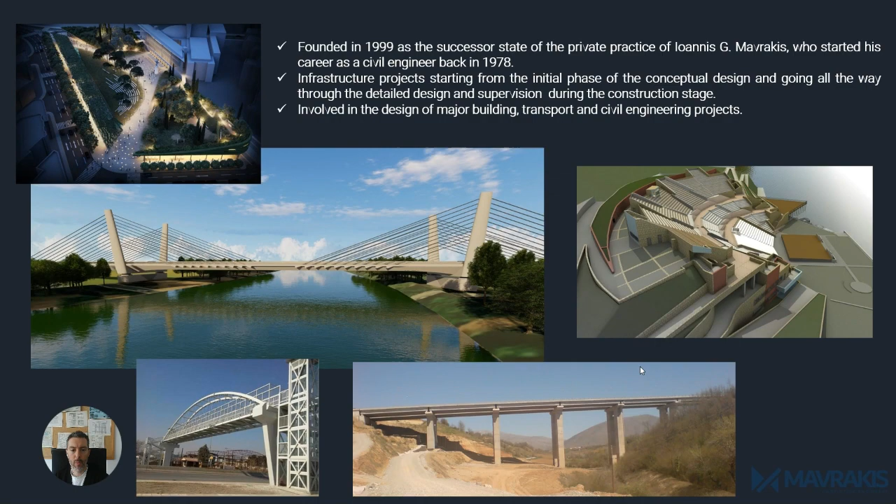Apart from that, we have also been involved in the design of major building, transport, and other civil engineering projects. The ability to deliver short deadlines at the highest possible quality enhances our competitiveness in structural and civil engineering. Technical excellence, highly educated staff, and teamwork have helped us evolve into one of the most reputable consulting firms in Greece, serving clients in the private and public sectors, both in Greece and abroad.

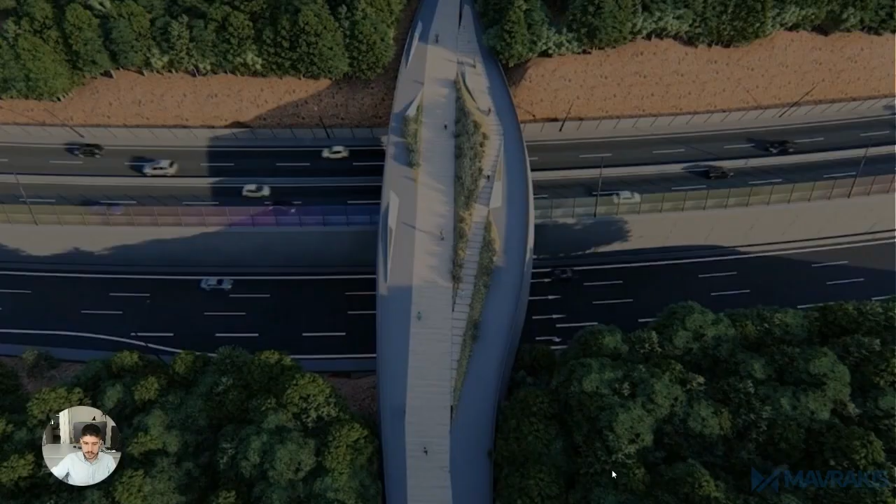The first project, the flyover project, is a 12-kilometer highway road. It will have a 7.6-kilometer elevated highway with 9 interchanges, a 4-kilometer flyover bridge, 9 bridges, 3 tunnels, and once completed, it will serve over 20,000 vehicles per hour.

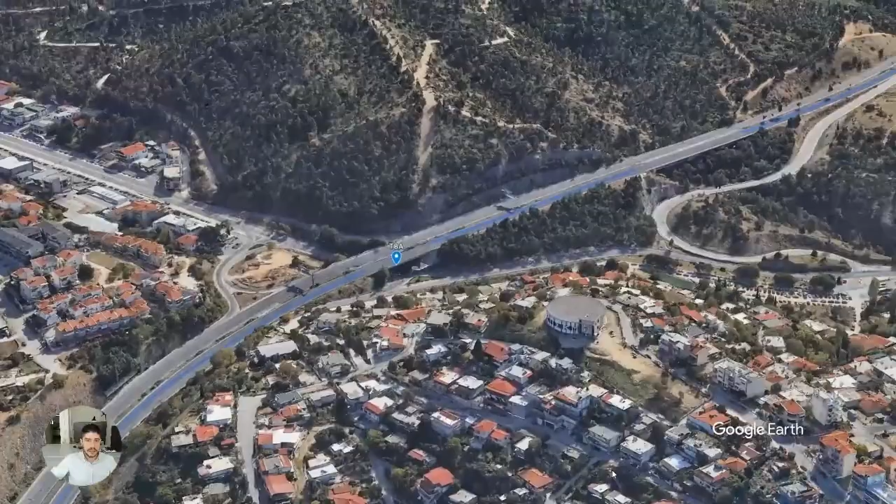Let's fly through the project. We fly over Thessaloniki. Here is the start of the project. Right afterwards, it's the T8 structure and then the T8A structure. As we continue to fly through the project, we can see the T11 bridge.

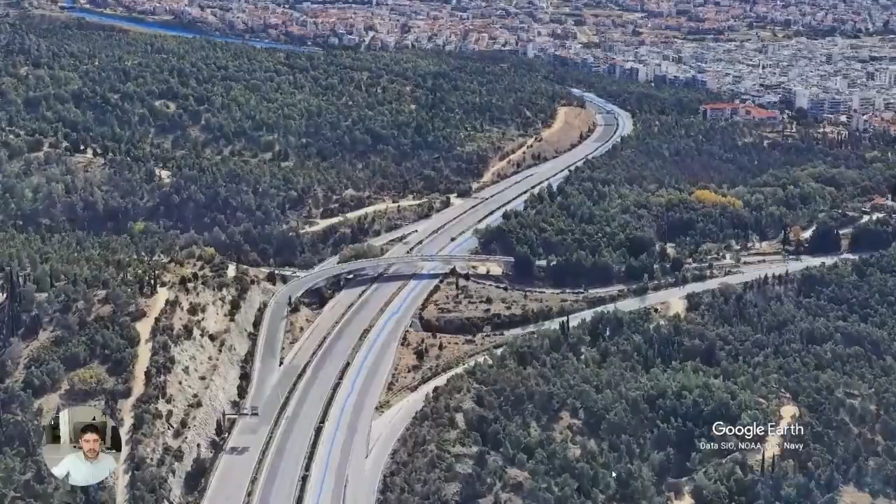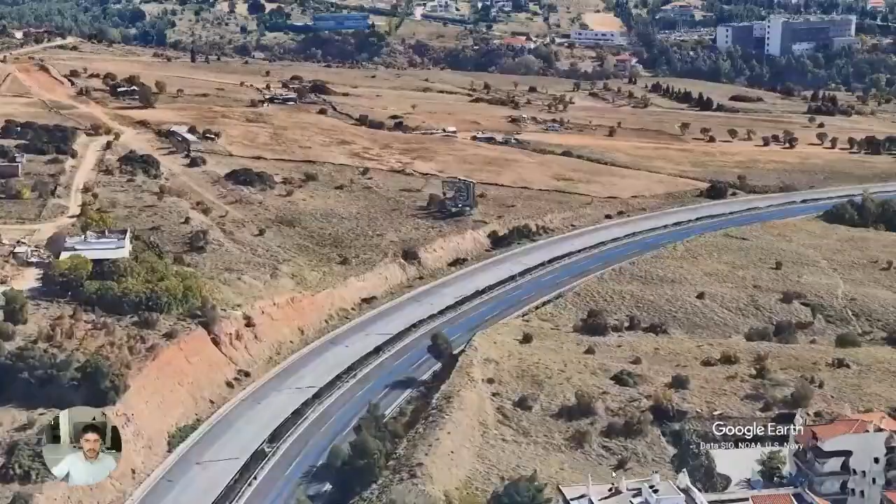Here we can see the location of the T15 structure. It's a cut and cover. Then it's the T19 structure, which is a bridge. Right afterwards, T21 is a tunnel. And near the end of the project is a composite bridge, the T23 structure.

And here is where our flyover project ends. We can see a panoramic view of the city. Here are all of the projects we are going to present from the flyover project.

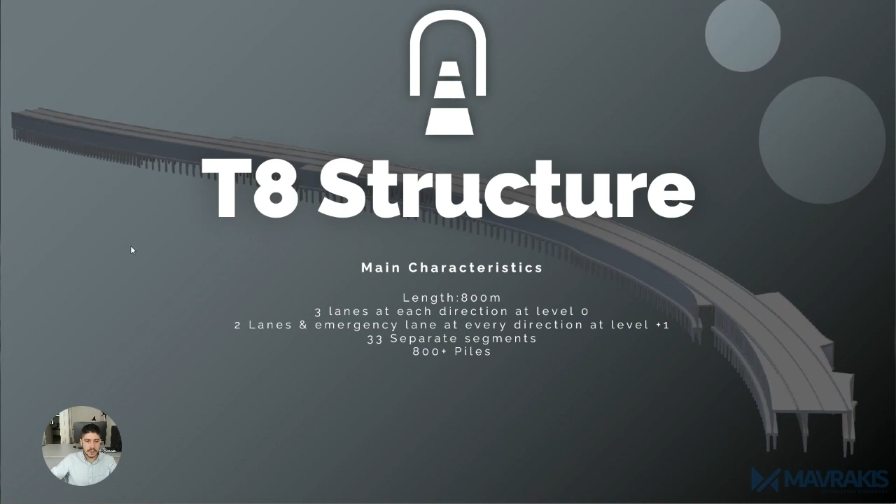Let's start with the T8 structure. It is a cut and cover with a length of 800 meters, with 3 lanes in each direction at level 0, and 2 lanes plus an emergency lane in every direction at level 1. It consists of 33 separate segments with over 800 piles. The advantages include quick and safe transportation with significant improvement of road safety. With the aim of reducing accidents, it will deflect 25 to 35% of traffic at level 1.

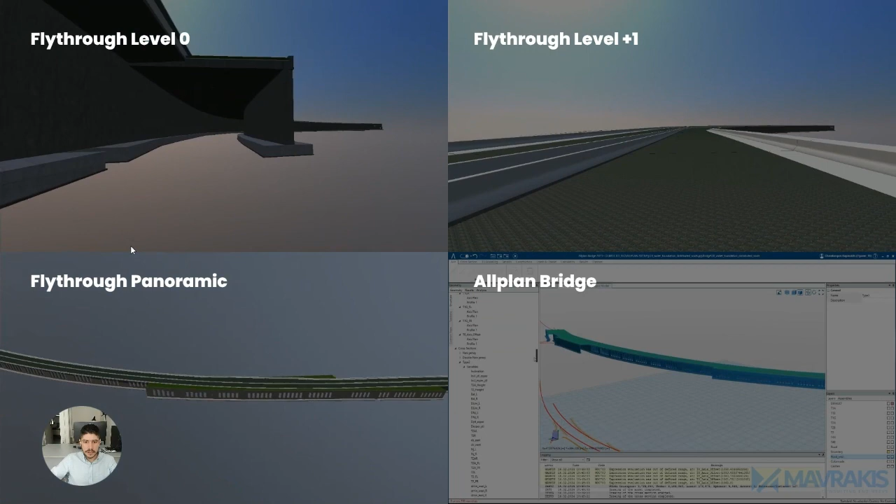Here we can see some recordings from the design process in Allplan and Allplan Bridge: a fly-through at level 0 and level 1, a panoramic view, and the design process we followed in Allplan Bridge. We can see some cross sections here in the bottom right window.

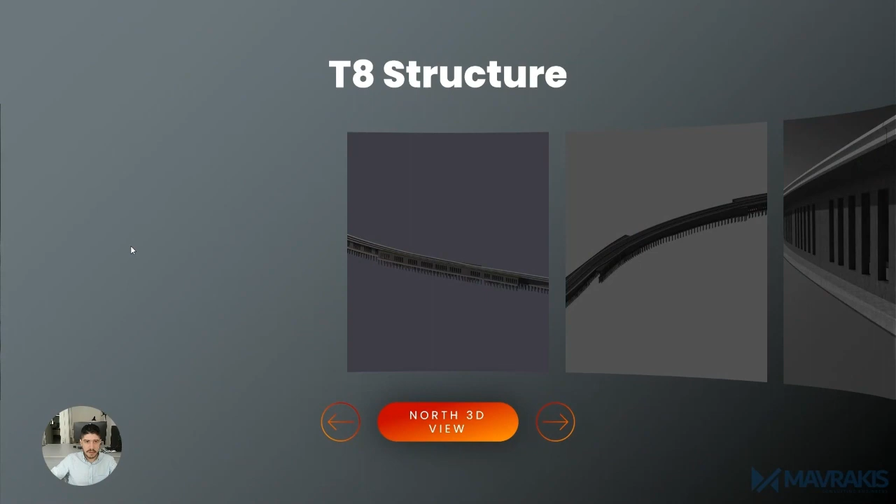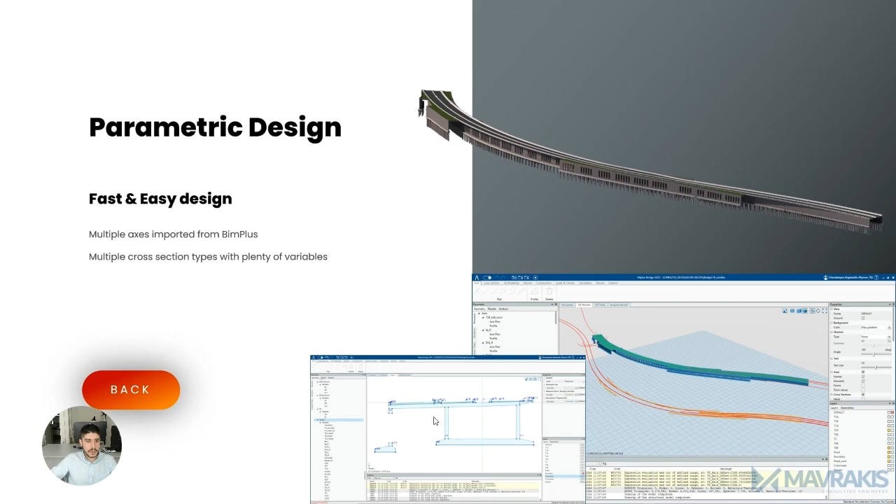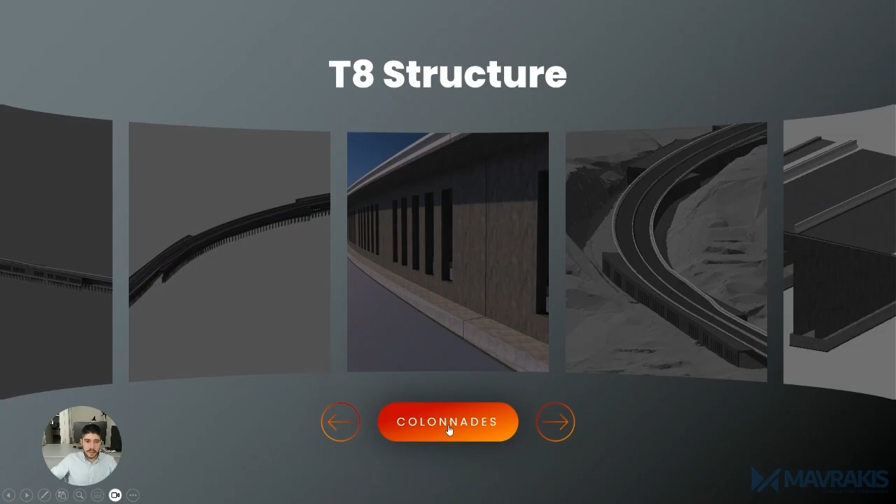Let's have a look at some images of the project. We used BimPlus for multiple axis import, which helped us design the walls of this structure. We used Allplan Bridge to design multiple cross sections with plenty of variables. We also used special functions and formulas to accurately design the geometry of T8. The colonnade design was made with the help of other programs too.

We exported the station of the colonnades relative to the main axis of the T8 structure with the help of Dynamo and Civil 3D, and then imported it into Allplan Bridge. Colonnade design was also made with the help of variation tables.

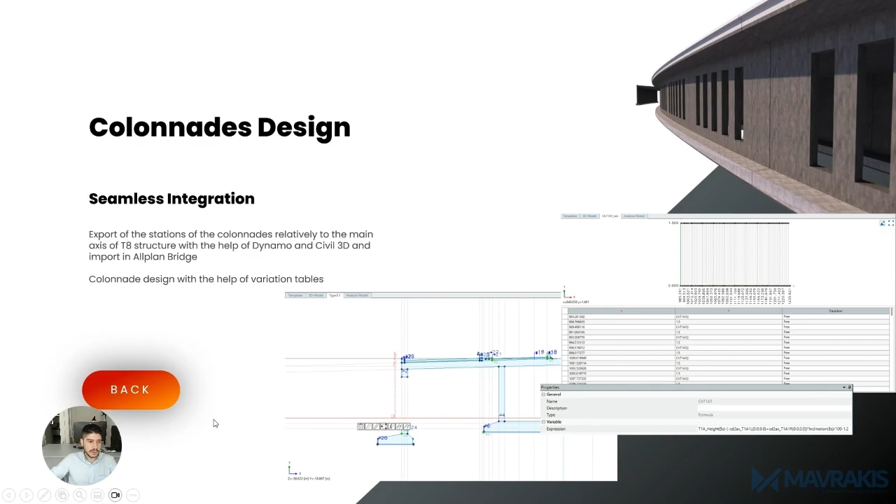We used Allplan to import the terrain of the project, which helped us export directly the terrain line in the drawings.

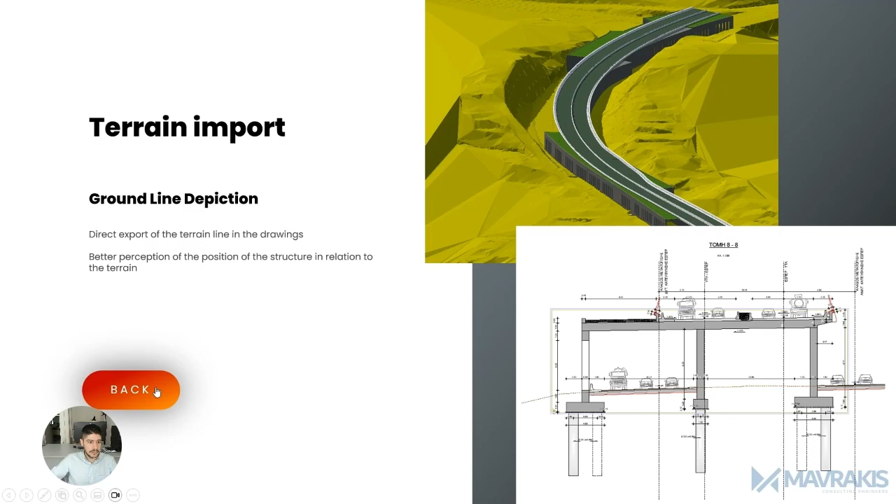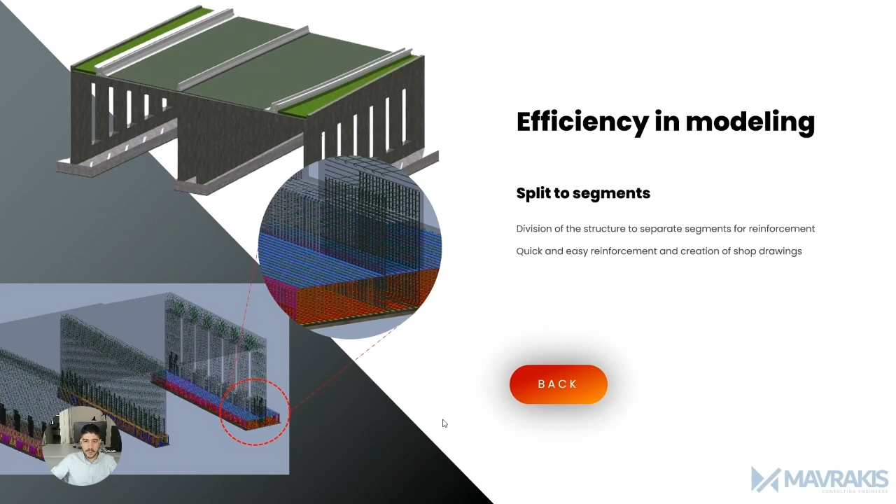We split our structure into 33 different segments for the reinforcement of the structure. Visual scripting played a crucial role in the design process, helping us place over 800 piles easily and quickly, saving plenty of hours of repetitive work.

Then we can see how we reinforce the piles I mentioned above. The reinforcement of the piles was made with the help of PythonParts, allowing us to easily and quickly create reinforcement drawings. In the end, we can see some drawings from this project.

Let's have a look at the second structure of the flyover project, the T8A structure. It has a length of 200 meters with 3 lanes in each direction at level 0, and 2 lanes plus an emergency lane in every direction at level 1. It consists of 2 sub-bridges, 15 piers, and 46 girders.

We can now see some recordings of our design process for this structure in Allplan and in Allplan Bridge.

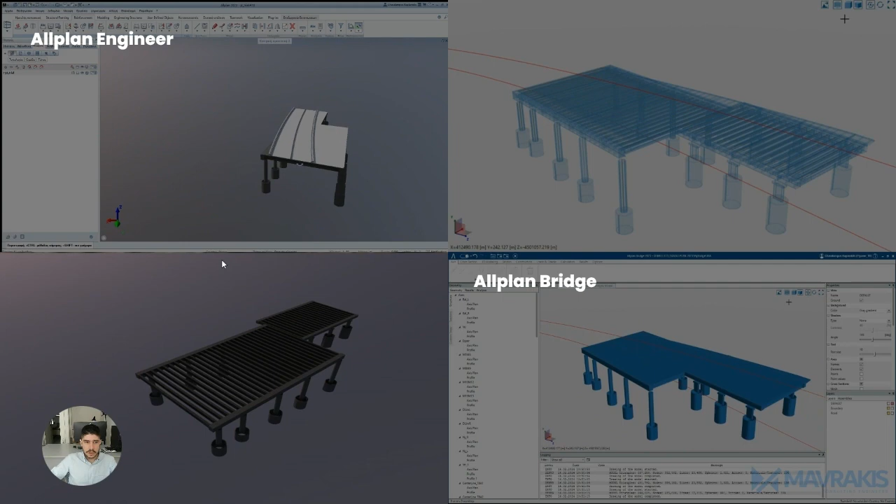We have designed the road above the upper slab with the help of Haunch function, and we have also imported multiple axes from BimPlus.

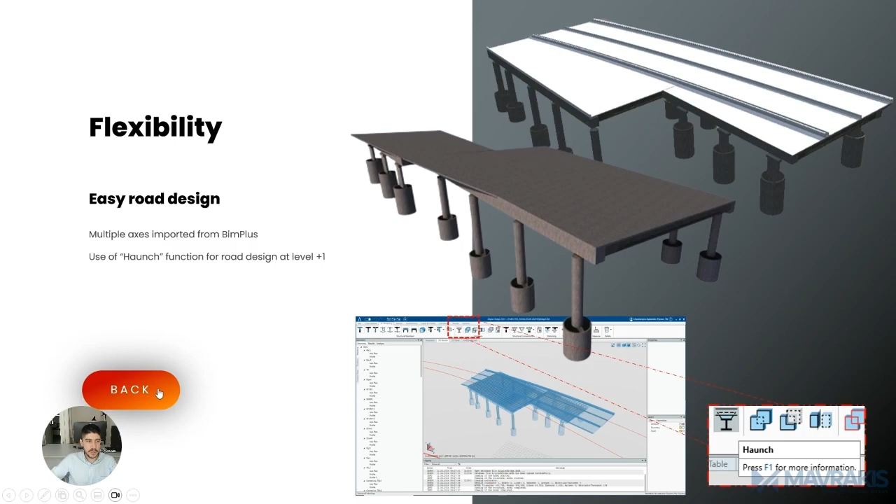The girders were designed easily with the help of the template function that Allplan Bridge offers, and a single change at the template applies to all members of the same type at once.

We have also imported the terrain as we did in the previous project, which helped us check if there were any collisions between piers and terrain.

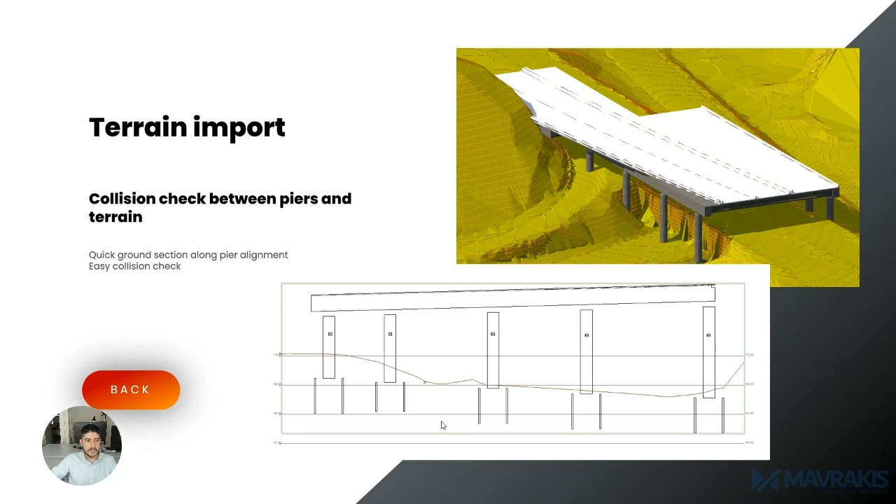Let's have a look at the third structure of this project. It's a curved bridge with a length of 100 meters with 1 lane at each direction. The bridge has great curvature. It's a concrete box bridge with 4 piers and it's seismic isolated.

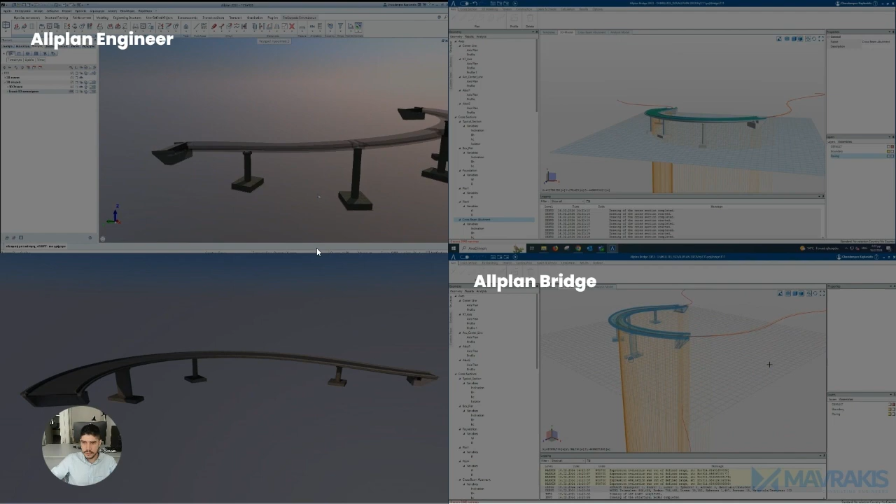Now we can see some recordings of these bridges from Allplan and Allplan Bridge.

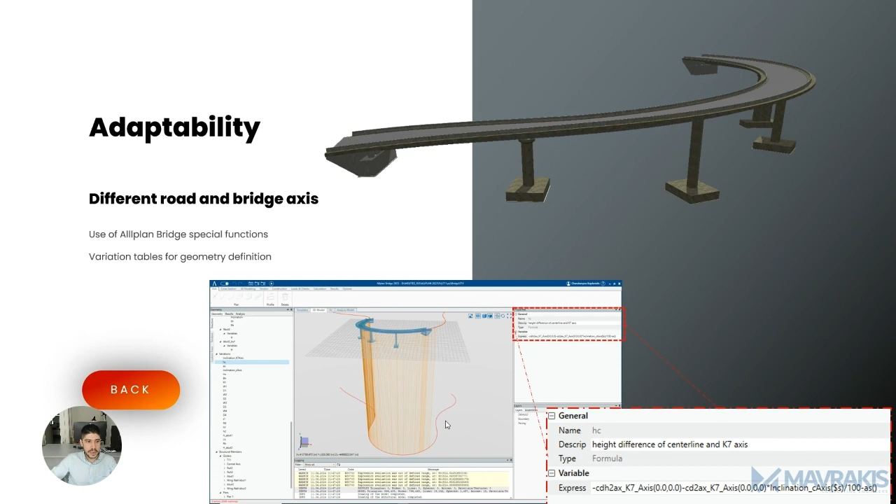The road axis and bridge axis were different, and the variation tables and special functions that Allplan Bridge offers helped us a lot.

We have used smart symbols to import seismic isolators in Allplan Engineer from Allplan Bridge directly, and then we can easily check the height of the consoles.

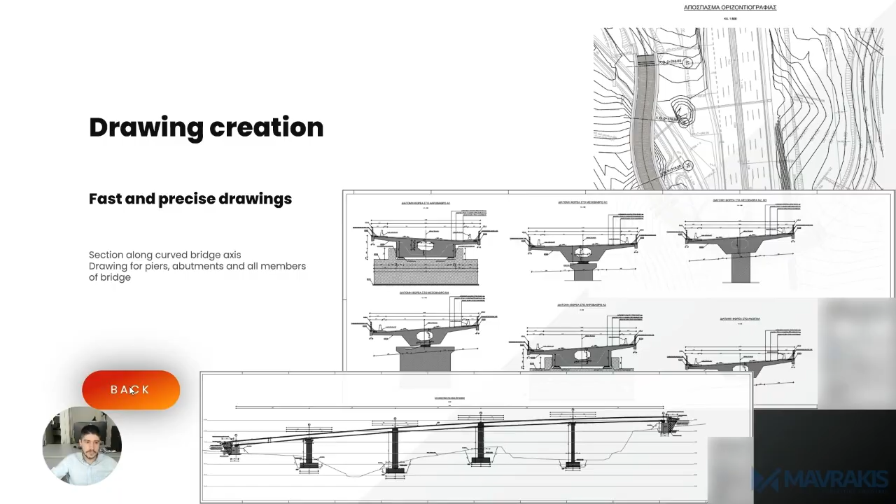Now we can see some drawings of the T11 structure, and we can continue to the fourth structure of the flyover project, T15.

T15 has a length of 700 meters with 3 lanes at each direction at level 0, and 2 lanes and an emergency lane at every direction at level 1. It consists of 26 separate segments.

It helps for quick and safe transportation, and it will deflect 25 to 35% of traffic at level 1.

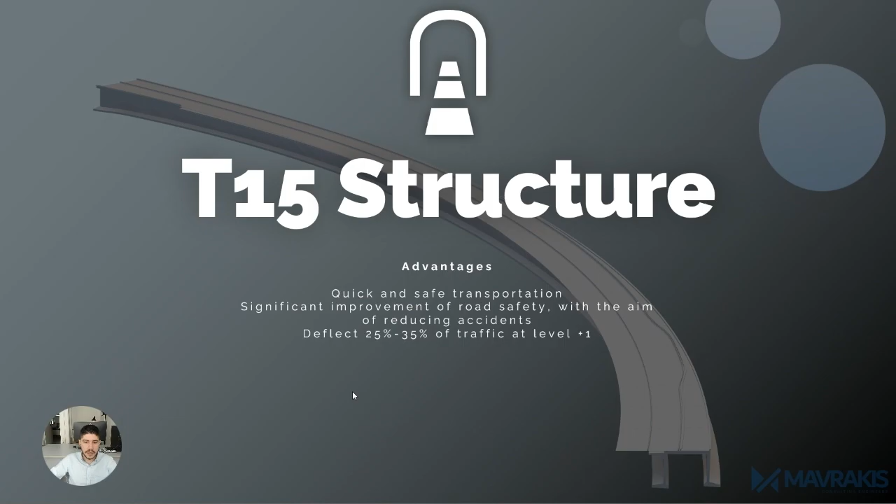Here we can see some recordings from Allplan, a fly-through panoramic view, and a fly-through at level 1 and 0.

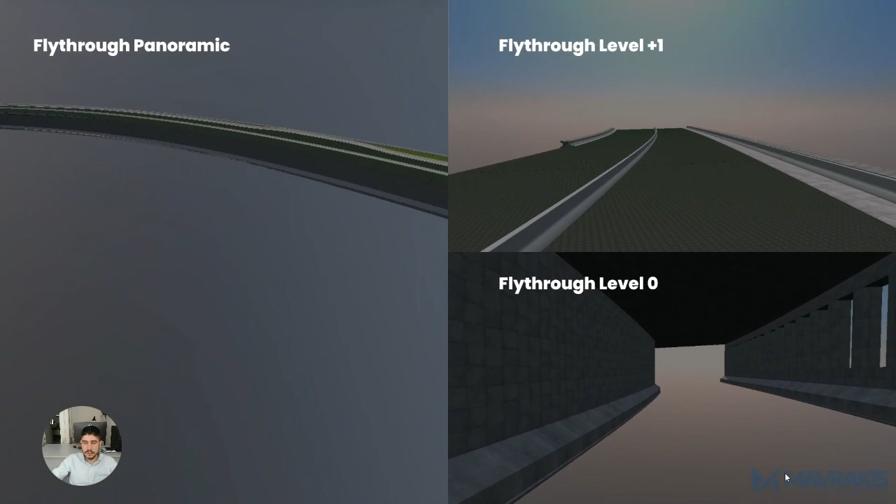And we can see also some recordings from Allplan Bridge and from the reinforcement of a segment.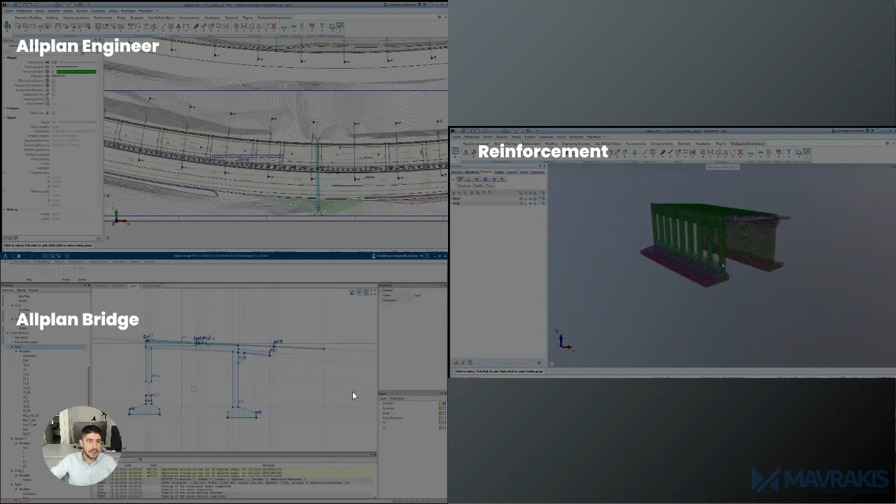We can see also some drawings that were made in Allplan fast and easily.

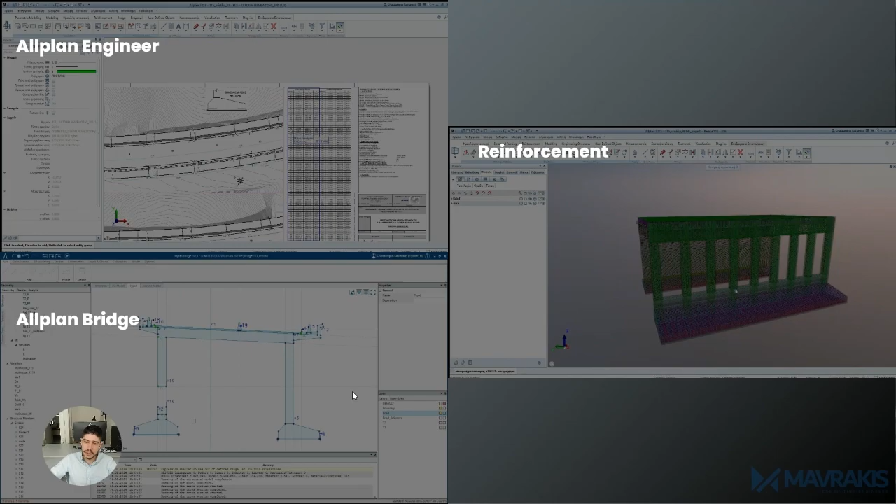We can see some cross-section types of the project at the bottom left window, and a 3D detailed view of reinforcement in the right window.

Let's continue with some images of the project. We have also imported multiple axes from Bimplus, and we have designed it with the help of multiple cross-section types with plenty of variables.

The colonnades were designed easily with the help of other programs too, such as Dynamo and Civil 3D.

And the import of the terrain helped us depict directly the ground plane in our drawings.

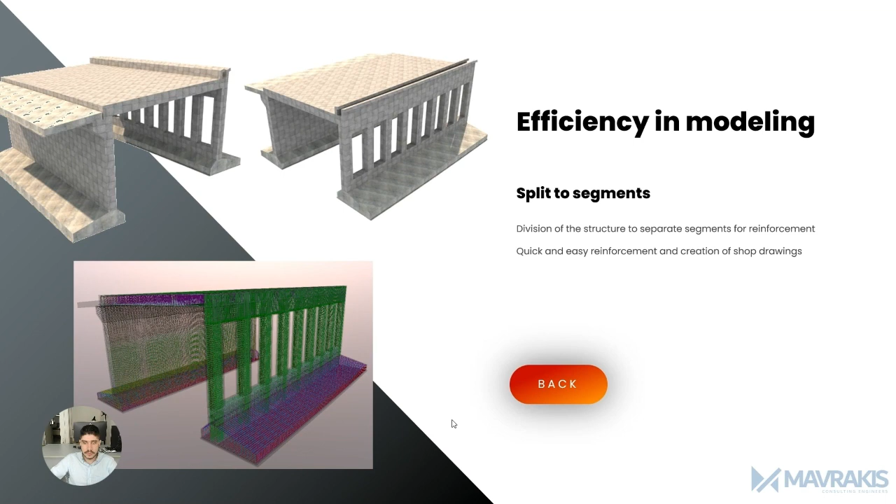Here is an image from the reinforcement of one of our segments, which helped us a lot to create fast and easily shop drawings.

And in the end are some other drawings of this structure. Now let's have a look at another structure of this project.

It's the T19 structure. It's a pedestrian bridge with 50-meter length, and it serves as a passage for emergency vehicles of the city.

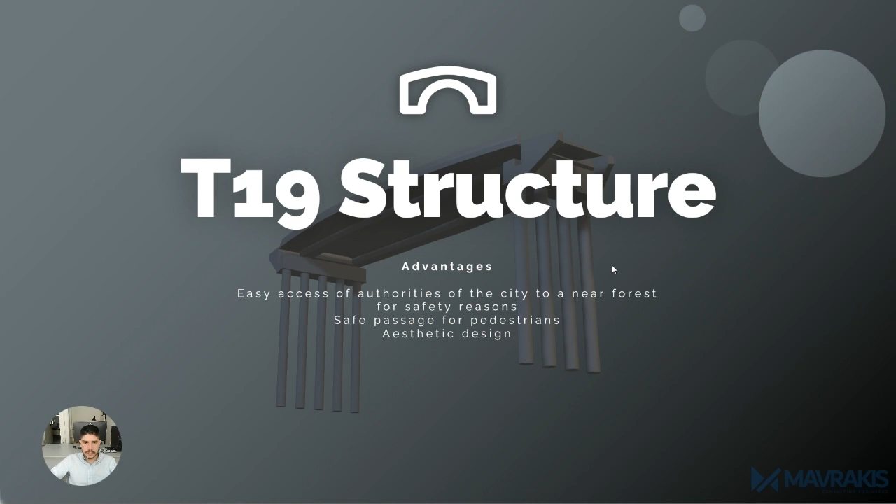It helps the authorities of the city access a nearby forest for safety reasons. It has an aesthetic design too.

We can see some recordings of this structure from Allplan and Allplan Bridge. Beneath this structure is the T15 structure, as we can see here.

We have checked if there were any collisions between these two structures.

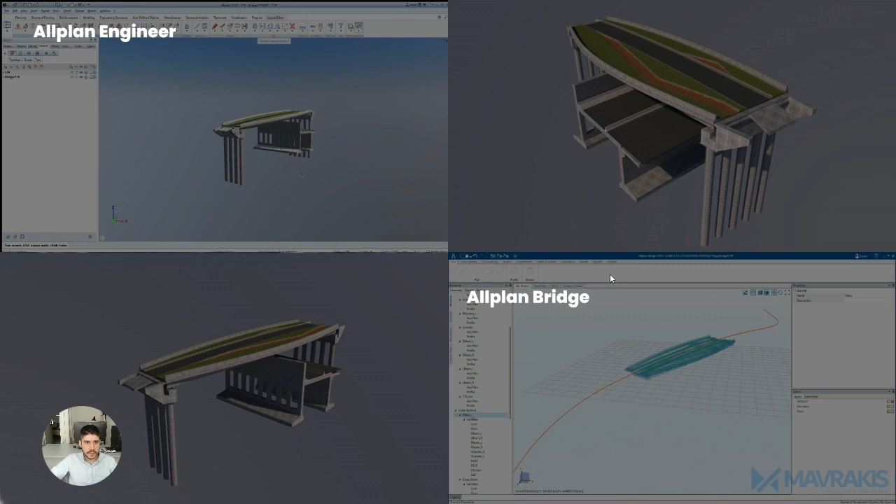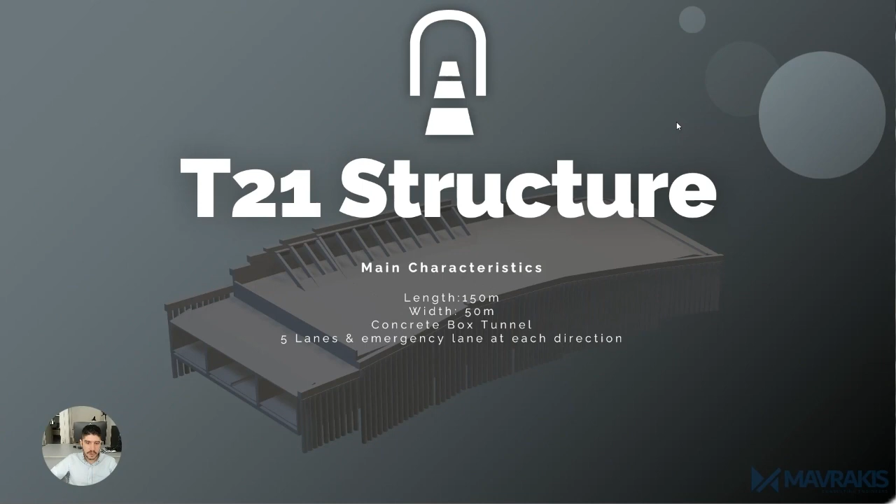Now let's continue with the T21 structure. It's a tunnel with a length of 150 meters and a width of 50 meters.

It's a concrete box tunnel with 5 lanes and an emergency lane at each direction. It consists of 2 curved pile walls with 180 piles.

We can see some recordings of this project from Allplan and Allplan Bridge.

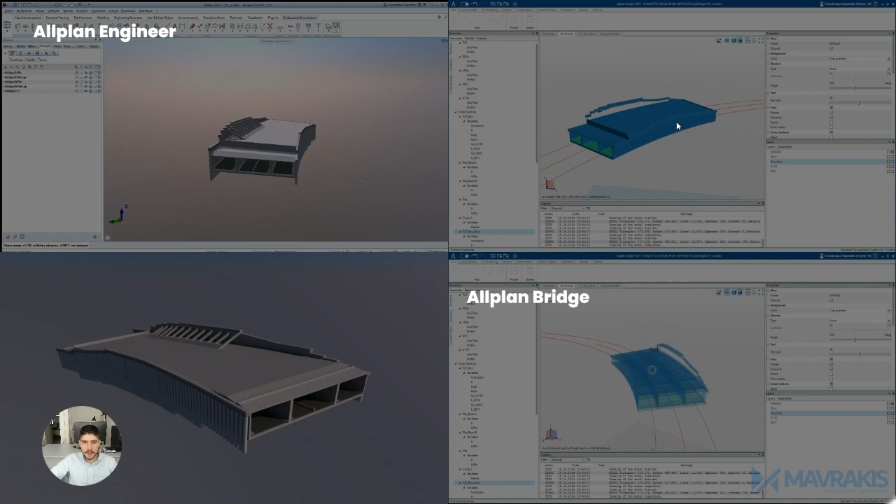Now let's have a look at some images of this project. Pile walls were designed with the help of Python parts.

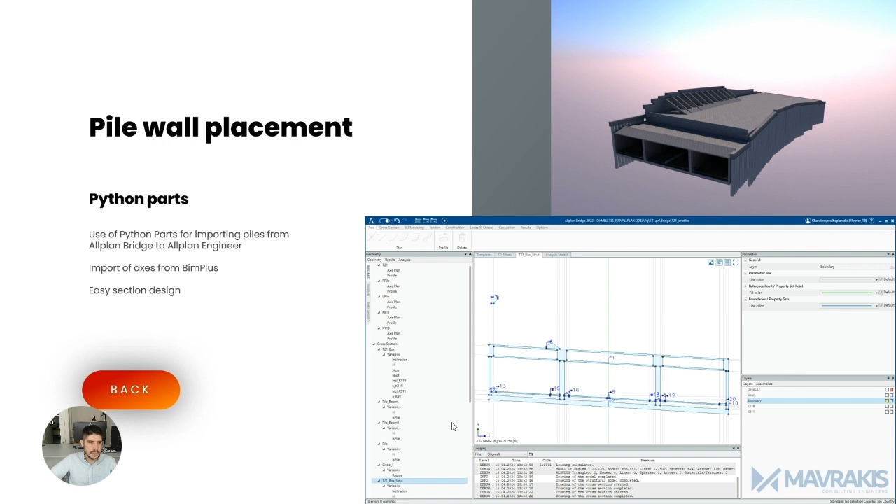We used Python parts for importing piles from Allplan Bridge to Allplan Engineer, and the axes were imported from Bimplus.

These are some drawings from the structure. The section-along-curve function helped us make the section you see here.

Now let's continue with the last structure of this project, T23. T23 structure is a composite bridge of 50 meters length, and it is a Homberg beam type bridge.

It consists of 2 lanes at each direction. The advantages of this bridge are fast and easy construction and the minimum possible disturbance to the traffic level beneath the bridge.

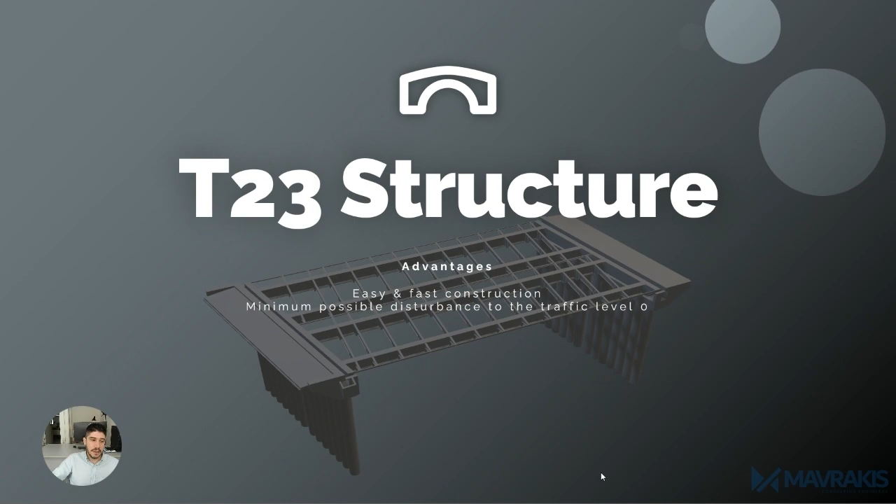Here we can see some recordings of Allplan and Allplan Bridge. As we can see, the composite section was designed as a hybrid between Allplan Bridge and Allplan Engineer.

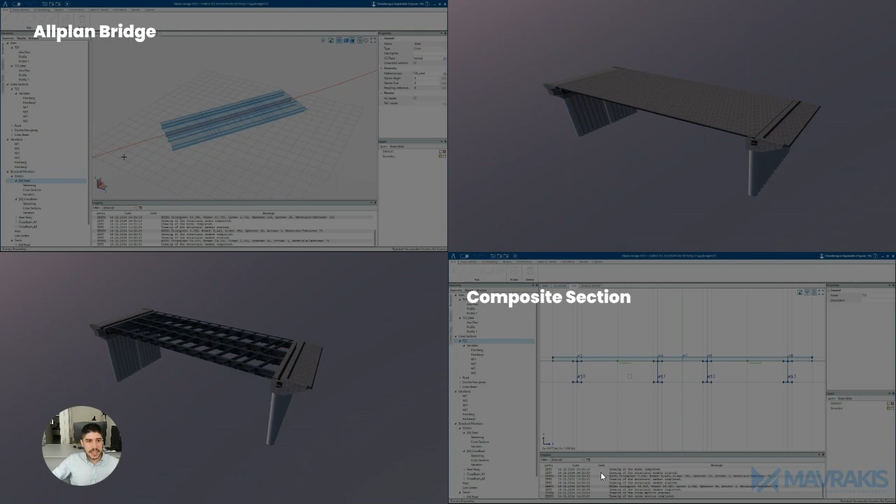What I'm saying is longitudinal plates were designed inside Allplan Bridge, but Homberg beams were designed inside Allplan Engineer as smart symbols.

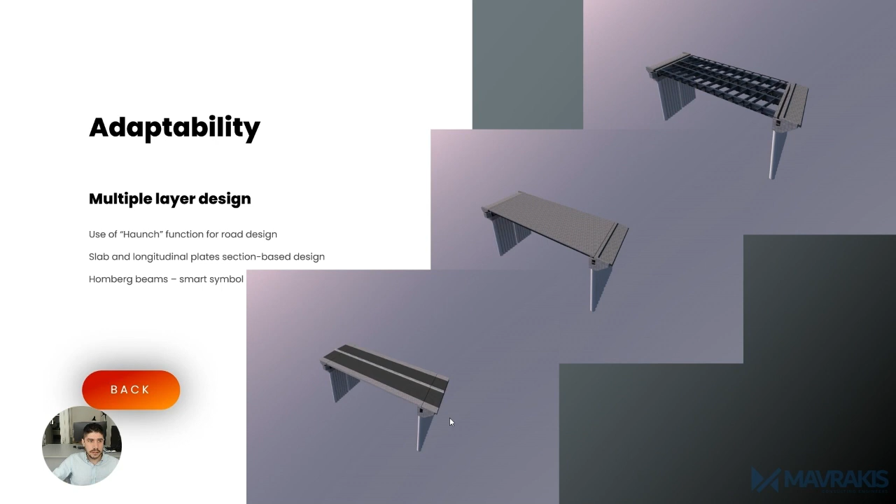For the superstructure of the bridge, we used the Haunch function for the variable height of road layers. But Homberg beams, as we said, were designed inside Allplan Engineer as smart symbols.

Here we can see a more detailed picture of Homberg beams.

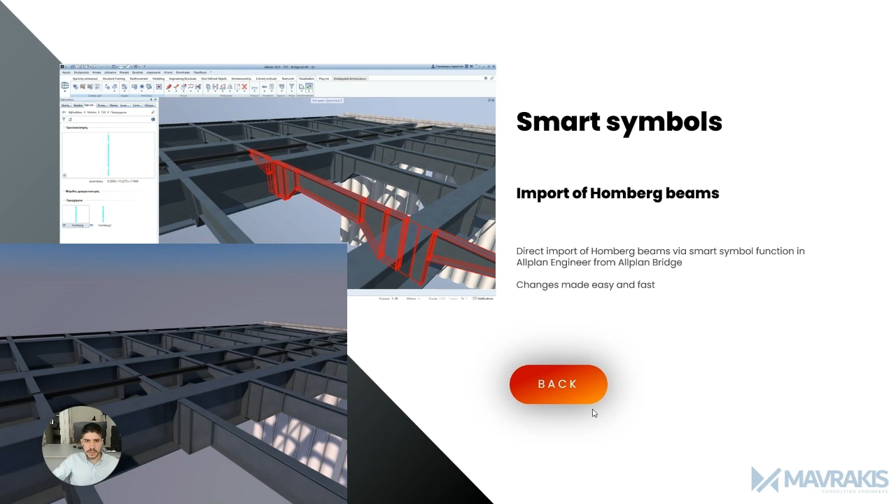Changes were made easily and fast and applied to all Homberg beams at once. And here are some drawings of the project from Allplan Engineer.

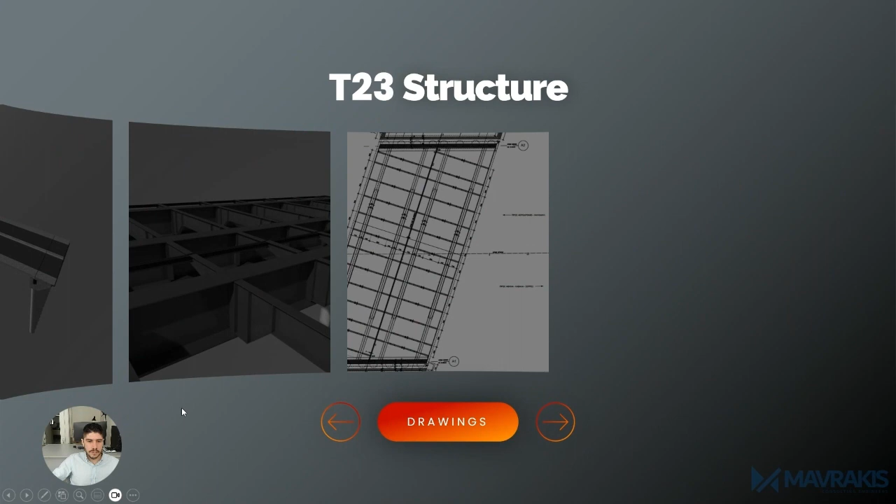Now let's continue with another interesting project, the Evros project. It's a bridge between Greece and Turkey, which will boost the economy for both countries. It's an extra-dosed bridge with two access bridges, part of the Egnatia Highway, Thessaloniki-Kipi section, located at the Greece-Turkey borders.

It has a length of 840 meters, 350 meters in Greek territory and 490 meters in Turkish territory. The length of the main bridge is 400 meters. It consists of 13 piers, 2 pylons of the main bridge, 2 abutments, 80 stay cables, 400 tendons, and 296 piles.

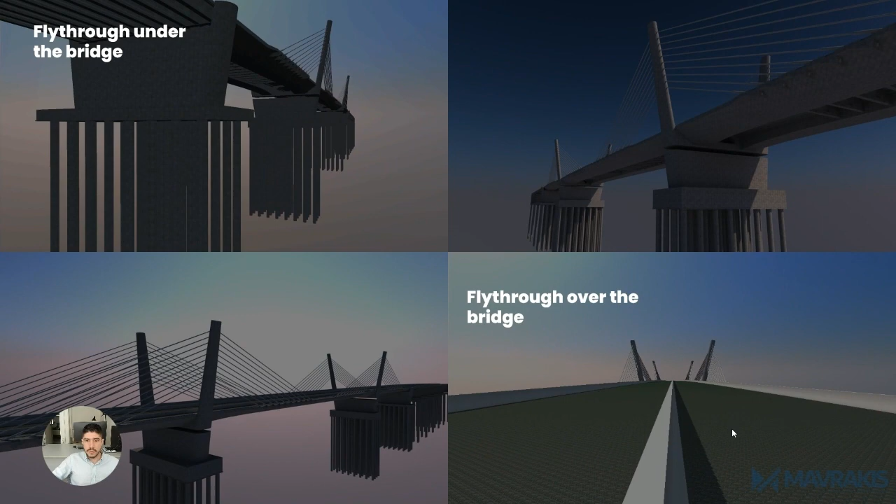Here are some recordings from the bridge, a fly-through under the bridge and a fly-through over the bridge. We can also see recordings from the reinforcement of the bridge and of the concrete blocks of the bridge.

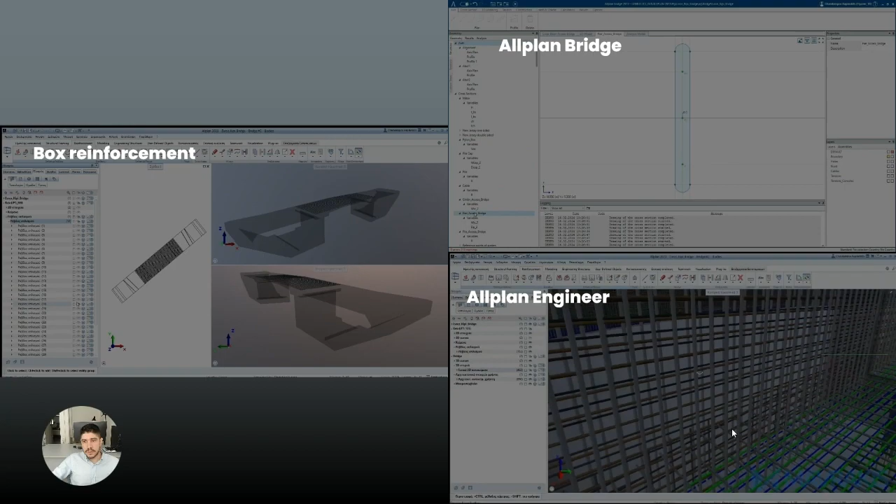We can also see recordings from Allplan Bridge, as we have designed multiple cross-section types for the main box, for stay cables, and for the abutments and piers of the bridge. We have also designed the tendons of the bridge, as we can see here in the 3D model.

Let's have a look at some images of this project. The definition of main geometry was made in Allplan Bridge, but special geometry like the elliptical cross-section pylons of variable dimension were made in the end in Allplan Engineer.

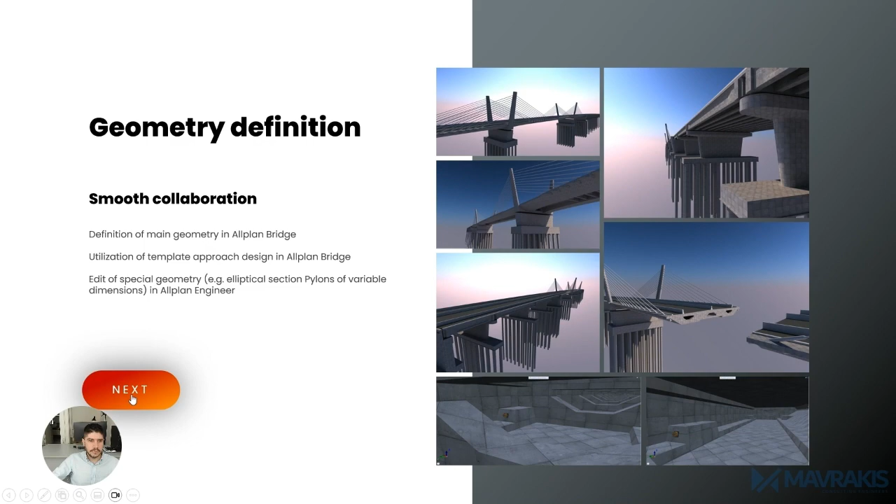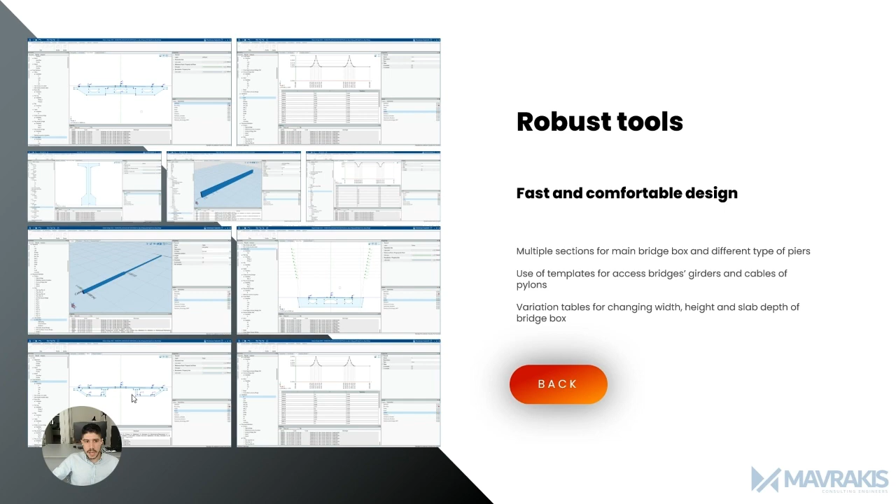Allplan Bridge offers robust tools for fast and comfortable design, as we can see here in some images.

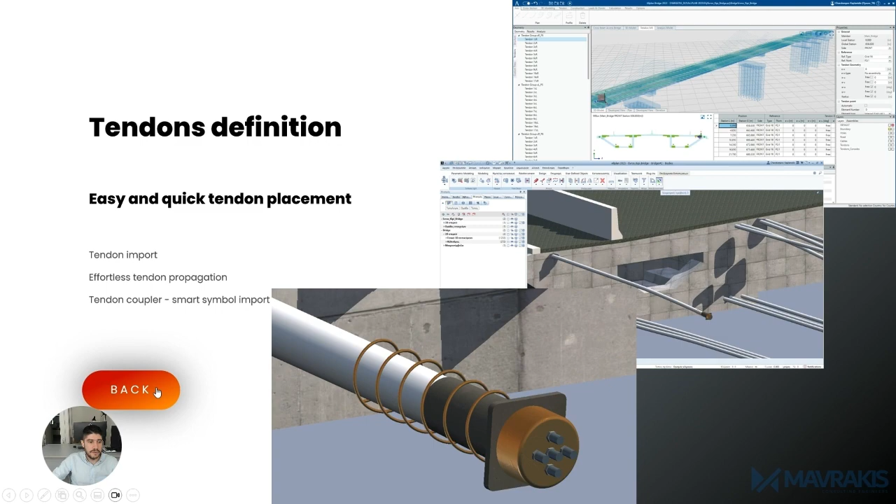As we said, we have designed tendons of the bridge inside Allplan Bridge, and tendon couplers are then imported as smart symbols inside Allplan Engineer. Allplan Bridge offers the feature for effortless tendon propagation.

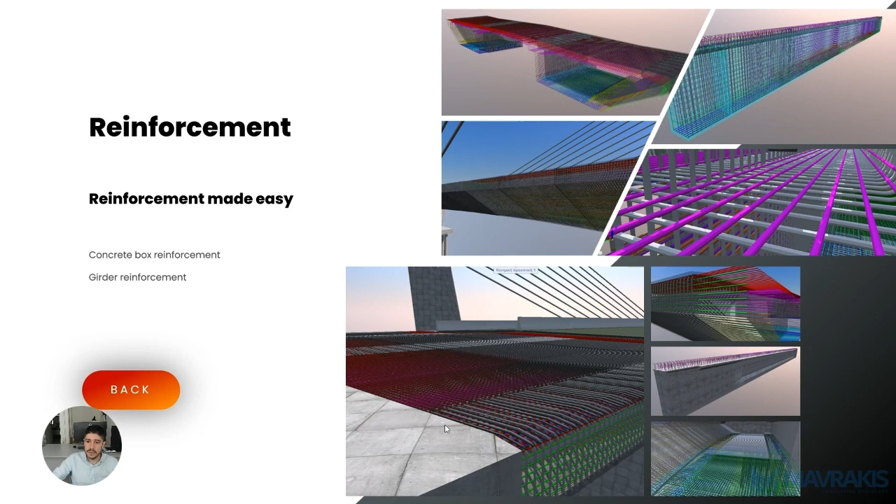Then we can see some images of the reinforcement in the concrete box of the bridge, and some reinforcement of the girders of the access bridges. In the end, there are some drawings of the bridge that were made within Allplan.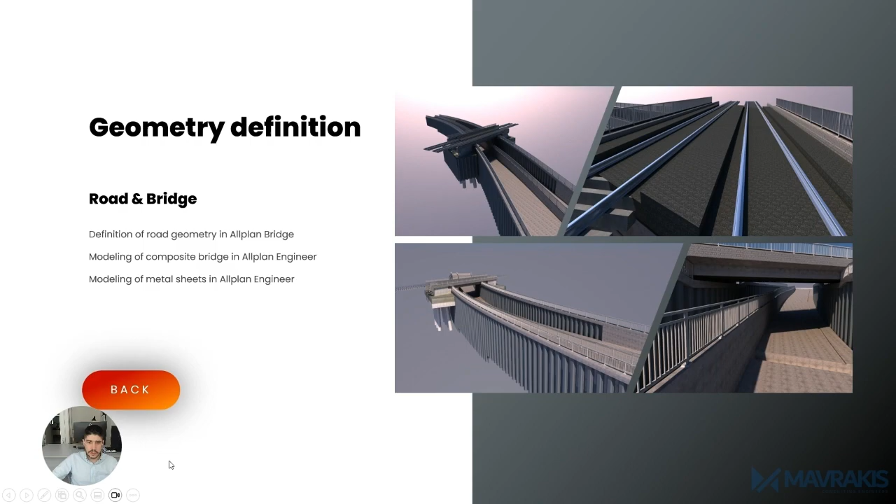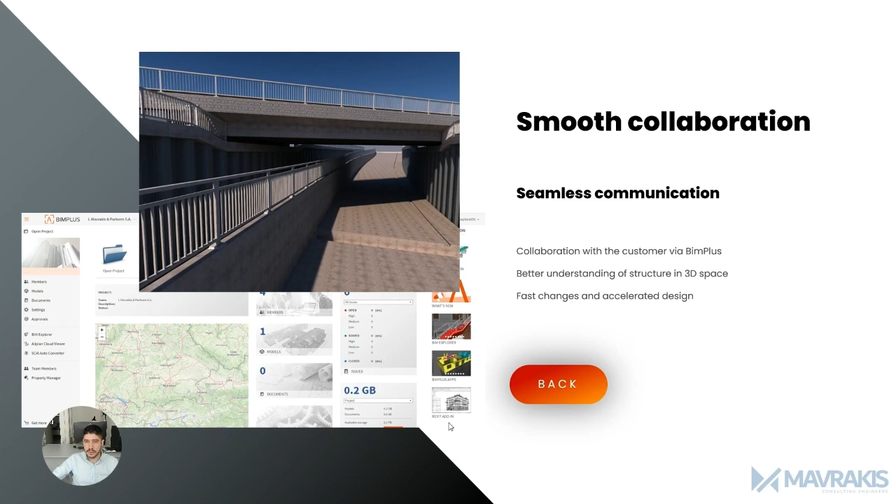BimPlus helped us for smooth and seamless communication between all the disciplines working on the same project, for better understanding of the structure and collaboration between the members.

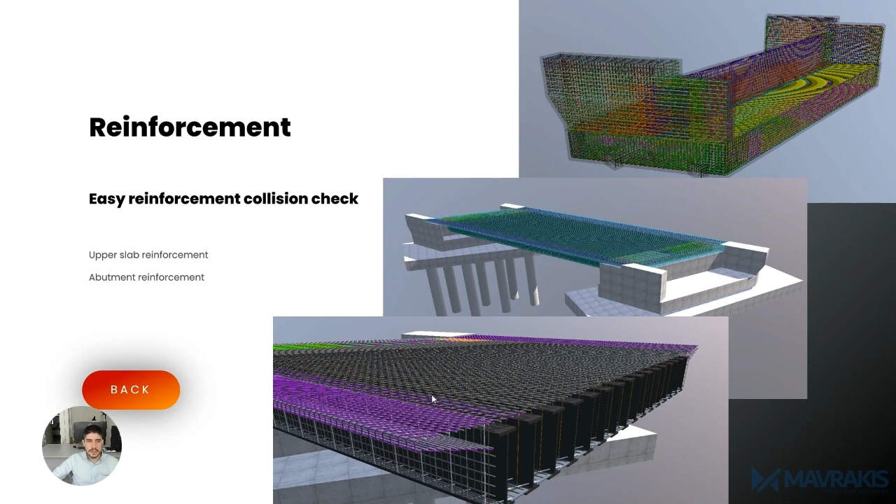Now are some images of the rebars for the upper slab of the bridge and the abutments of each two. In the end, are some drawings of this project.

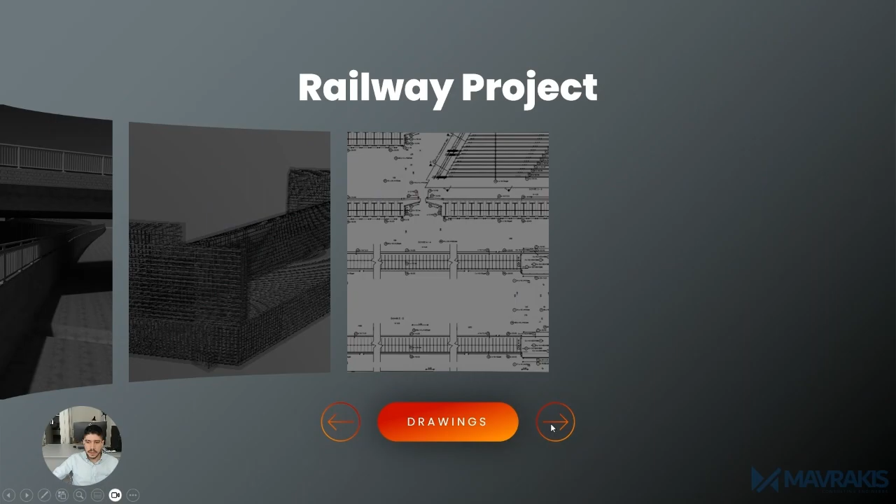Let's have a look at our fourth project, the Igoumenitsa project. Let's fly through the Igoumenitsa project. It's located near Igoumenitsa, one of the largest and most congested ports in Greece.

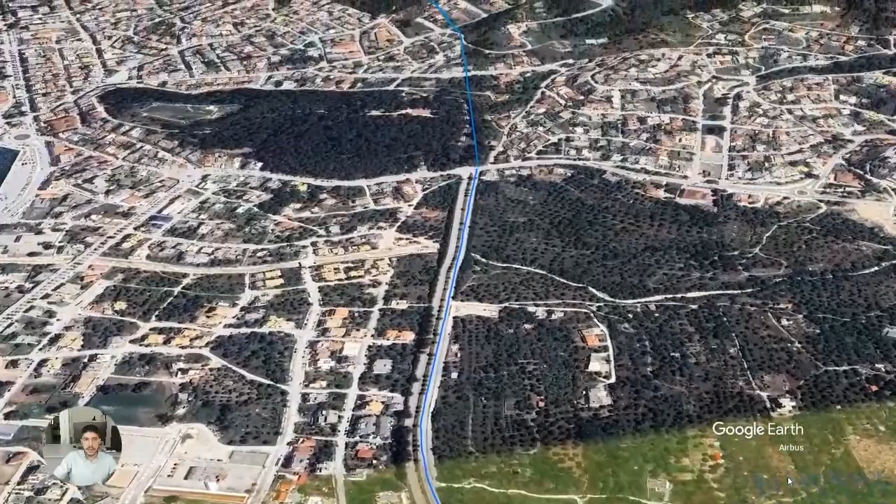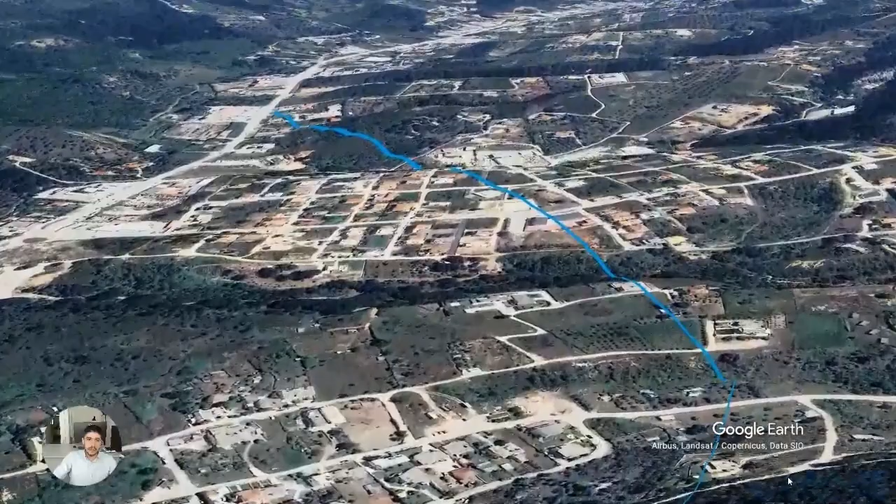The office has undertaken two main structures in this project. The first one is a double cut and cover, and the second one consists of one cut and cover and twin tunnels. Here is a panoramic view.

Let's delve into the first structure. A double cut and cover has a length of 325 meters and two lanes in each direction. The advantages of this structure are the seamless vehicle traffic at above level and the reduction of visual impacts in the landscape.

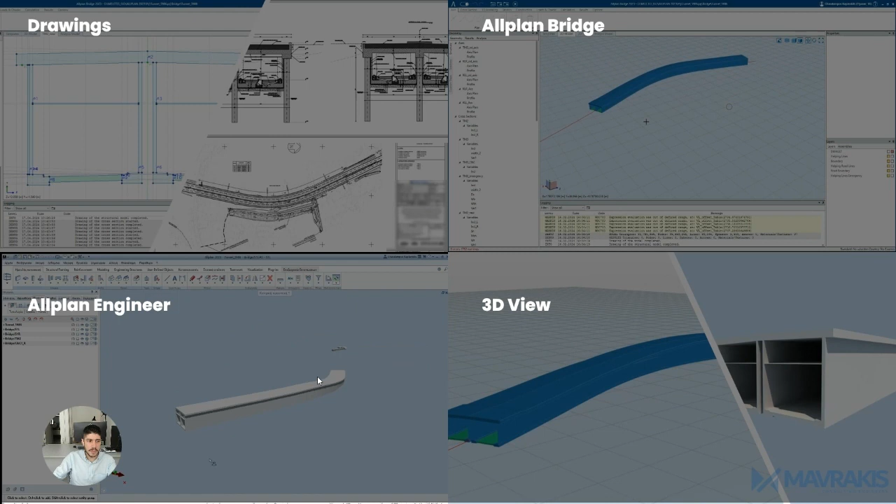Here are some recordings from Allplan Bridge and Allplan Engineer. Let's have a look at the second structure of this project, the twin tunnels with a cut and cover in front of them.

The cut and cover has a length of 160 meters, while the long tunnel has a length of 230 meters, and the short tunnel has a length of 170 meters. There are two lanes in every direction.

The advantages of this structure are the significant increase in vehicle traffic volume and the drastic reduction in commuting time. It will help people bypass the city of Igoumenitsa, one of the largest and most congested ports in Greece, as we said earlier.

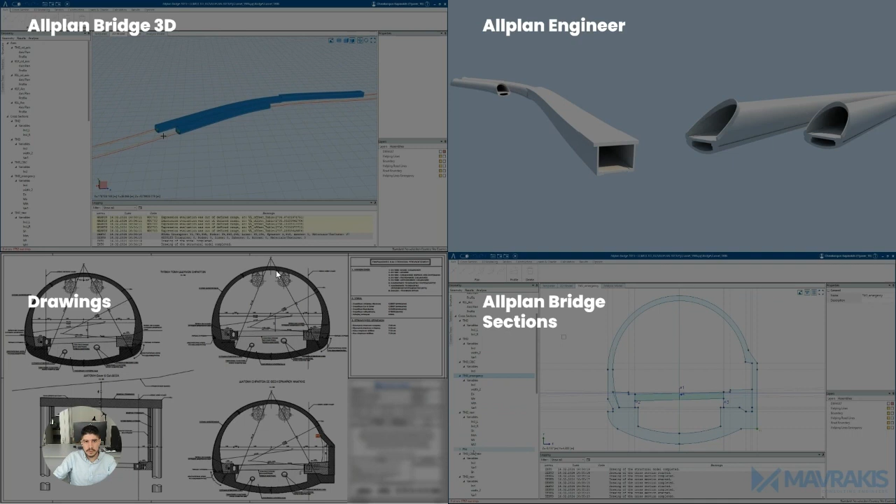Here also are some screenshots and recordings of the project, some cross sections of the tunnels, emergency sections, and some sections of the cavern cut.

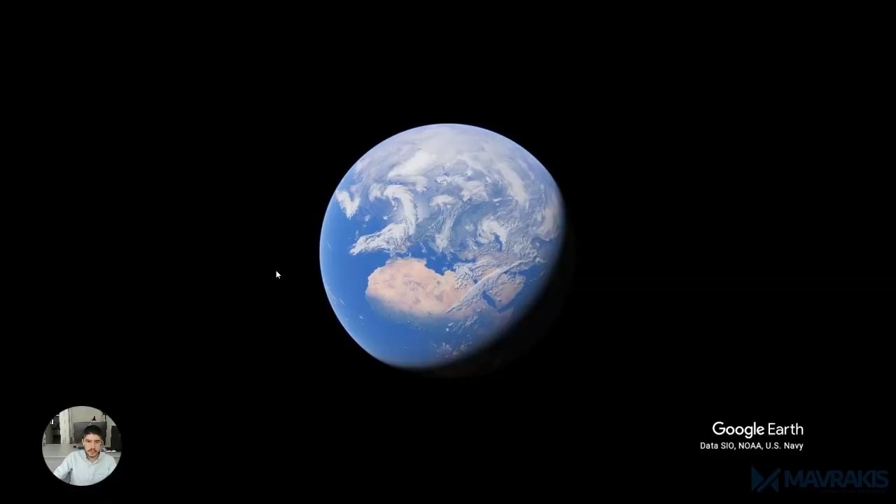And let's continue with the last project, which is a bridge, the Handakas project. It's located near Kozani, a city in Greece. It has a length of 100 meters. It's seismic isolated with a great curvature.

Here you can see some screen recordings from the reinforcement of the bridge and of the design process inside Allplan Bridge.

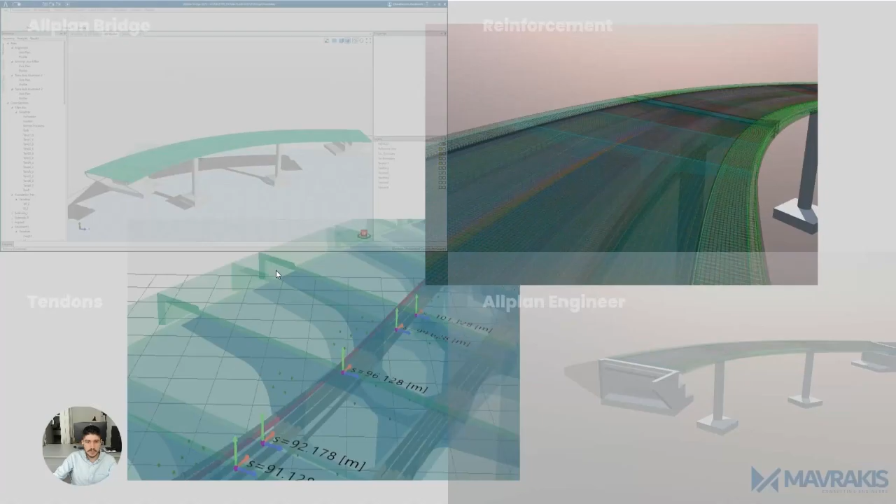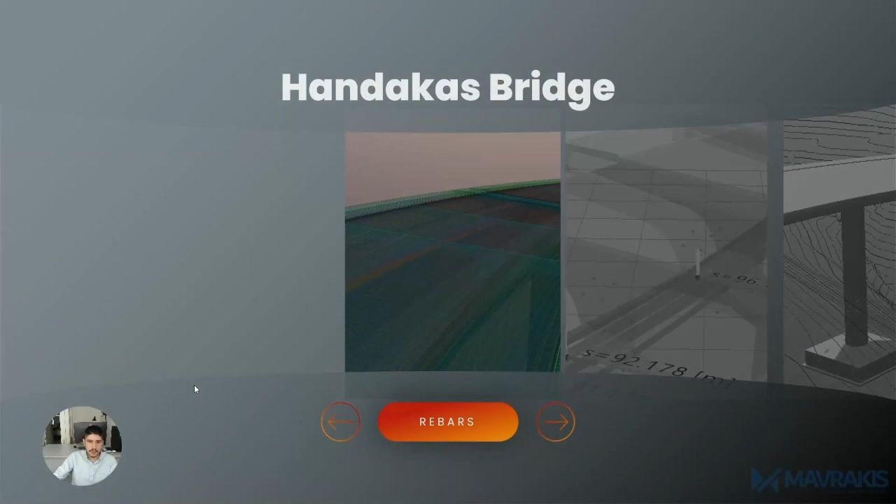We reinforced fully our model, the concrete box, the piers, and the abutments of the bridge. We have also placed the tendons of the bridge, and we made a check for possible collisions between tendons due to the great bridge curvature.

We have imported the terrain of the area in order to define the pier level foundation. And here are some drawings of the bridge.